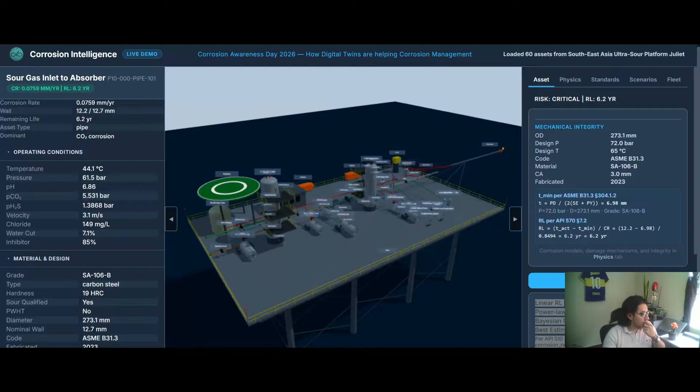So let me start. This is pretty much to share what we develop on Infinity, about the problem that we actually saw here. Imagine that you have this situation. This is an offshore platform that actually has a pipe carrying a hot acidic fluid full of dissolved gases. Over months, over years, the inside of that pipe is slowly being eaten away by the chemical reaction that we all are familiar with in these kind of platforms.

So the wall of that pipe actually becomes thinner and thinner and thinner, and at some point any of the pipes, any of the assets that we're seeing here, are going to fail. A leak, a rupture, or anything related to an unplanned shutdown that might cost millions of dollars and potentially puts a lot of people at risk. So this is mainly, in big words, the issue that we assess pretty much every day to avoid this risk, to have the best shape situation in the plant, and to confirm that the things we are doing are going properly.

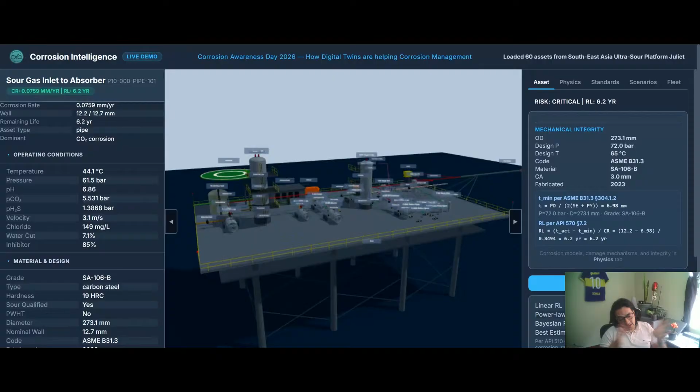So this is a 3D simulation again from a platform located in Southeast Asia, an offshore platform. We name it Juliet, it's not the actual name of the platform. So synthetic data on there. Thank you to our client for allowing us to use the data to train our models without violating any of the agreements that we have right now.

So we can navigate into the platform, we can move around, we can see the condition, we can see the pillars, we can see how many assets we have, we can go close here, and we can bring the information. So on this left part, we have the static data, the design, the operating data that is supposed to have everything: temperature, pressure, pH, CO2.

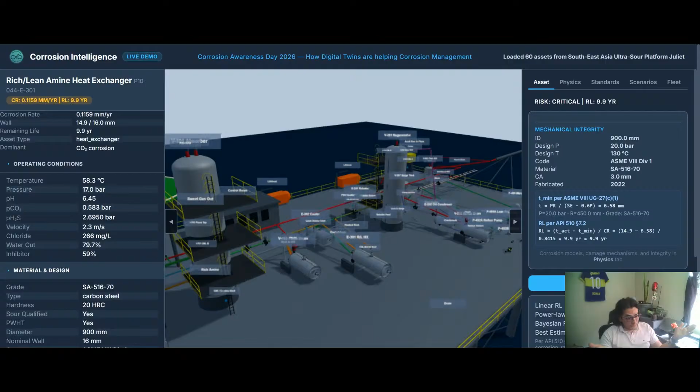This is taken from real time data, the values for pressure and temperature from the sensors. Also the chlorides, what is the design material, the grade, the type, the hardness, if it's post-weld heat treated or not, the diameter, the nominal, that is important, and also the code that information was taken from.

So I'm gonna bring the codes into a following part, but right now we have that any vessel that we select, any pipe that we select, it has the code related that we take the information. If it's vessel, if it's pipe, we can see the information here, and ASME B31.3 related to that pipe. So we built 4 corrosion engines.

So you're wondering what are those 4 corrosion engines here. We take 4 published corrosion equations, each handling a different type of chemical attack. Think of them as 4 specialists on a medical team. Each one is an expert in a different disease, and the system calls the right specialist based on what the patient needs.

None of us is a super expert in every field here. So we have reliability that is expert on that field, corrosion, material, design, rotative professional. Everyone is different, we have different skills, but together as a team, we build the best approach possible, bringing the appropriate specialist to the need that we have.

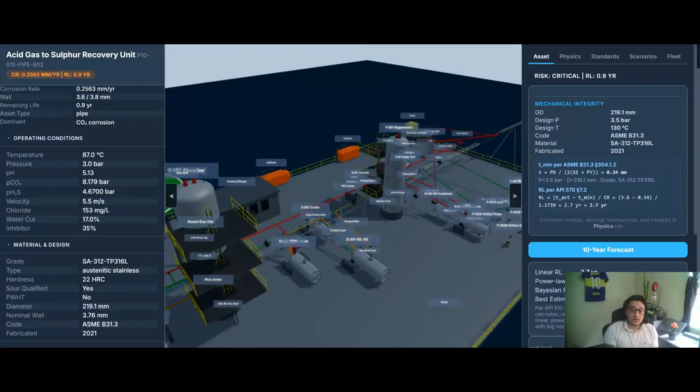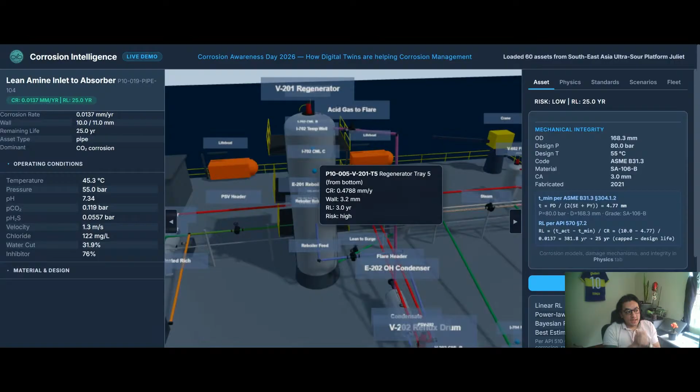So let me share here. Again, we're gonna now jump into the right part. I'm gonna just go around and show you a little bit closer. We have some of the tanks here. This amine inlet absorber, this is a pipe. We can click on whatever asset we want to check, and the information changes based on that related asset.

So five windows here. Asset, that's pretty much mechanical integrity. What are the equations we use for TMIN, for RL? That all is based on standards from API, from ASME. We use apps as well as a reference, and everything is calculated that way. So we have that mechanical integrity here.

We have the risk that we are supposed to have, and we can have a forecast. This forecast shows how the life of the equipment is gonna be. We have a threshold of 25 years at max. So if we click on the forecast, we know now in a graphical way that this equipment is not going to fail within those 10 years. It's going down for sure, but it's not failing. So that's the first window that we have here.

Let's jump into the fun part. So physics. We have again the models, the engines that we take from the equations. We also have the standards that we follow every day for each of the assessments, and we bring that into one calculated part, what the equations resolve. That's the physics-informed machine learning model, what the model learns from the data and applies the physics that we input into the model, and the relations between them.

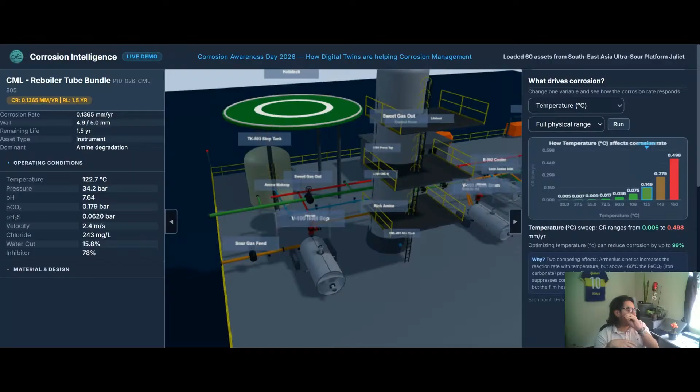So this is a pretty interesting part for including the best assets, the ones where we have 90-95% similar calculation, and also the ones that don't have the best compelling information. All the tools that we included here show you that these mechanical features are only in a linear way, and we cannot include the electrochemical situations that we might have inside. So let's jump into these three scenarios that we have here.

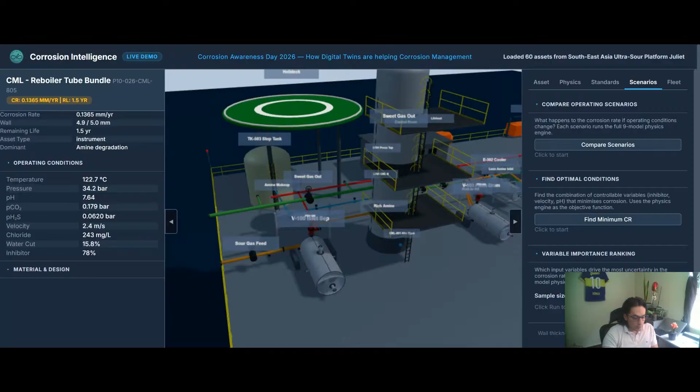I'm gonna make a pause just to confirm if the screen is still sharing well, sound is coming through well, or any weird thing happening, just to confirm. Let me see the chat. We're gonna solve those questions at the end of the session, so just as a confirmation. Let me. Okay, okay. Thank you so much for confirming.

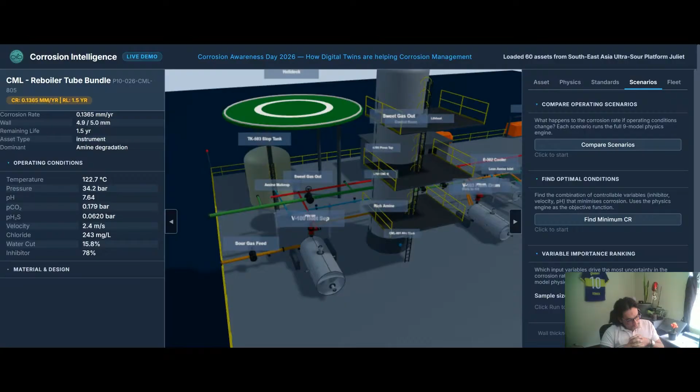So okay, let's jump into these scenarios. This is also a different feature that we include in this model, because here we can compare operating scenarios. So what happens to the corrosion rate if the operating conditions change? This happens all the time. So let me compare the scenarios here. Again, we saw on the previous sweep what the changes are. We have here inhibitor, pH, high velocity, or high temperature.

So what happens if we have high corrosion inhibitor? For sure the corrosion rate is gonna go down, but the question always is by how much, by what percentage, how effective is our inhibitor, is it effective or not. So we compare against the baseline corrosion rate, and we can see here if we increase the inhibitor, we have the pH that is stable, and low pH for upset conditions can increase the corrosion rate.

But the worst scenario on this asset we selected will be high velocity, a 213% increase in the corrosion rate. So it's also a pretty cool feature that we can calculate how the asset is gonna behave under different conditions. Let's jump into the following one.

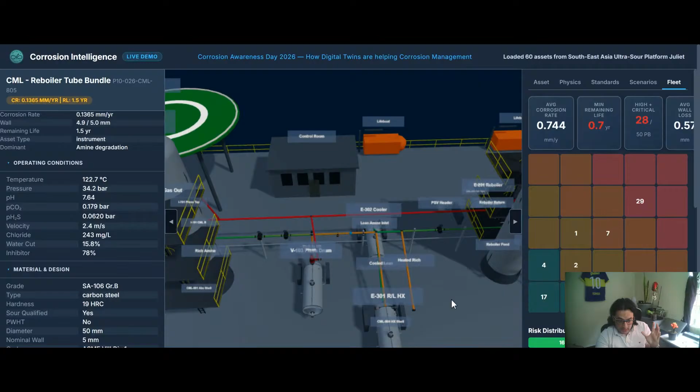However, it is connected on the client's end to the real-time operating, the APM connection that they have, the asset performance management, APM, and also the real-time asset data that they have in the database. So anytime that, for example, they replace this valve, this pipe, we will have that uploaded into the model instead of just going in, downloading the data, changing the information, uploading into the model, rerunning the model, retraining the model. So it will upload that information in an easier way to interact between the client database information and what the model is actually showing you guys.

So that's pretty much it here. I'm gonna just give you a quick round. This is in a development phase. The 3D models are for sure not super accurate like 3D laser analysis, no. But we have the most important part, that is see what the facility is doing, how the facility is doing, what is the risk of the facility right now, what is the driving corrosion rate per asset, how we can inspect it.

So we have at least five, six, or seven systems, including Excel, including PI, including APM, including ECMS or whatever asset management software you guys use, into just one view that can check the information, not jumping into different models or different software that we have. Not six or seven opening software between that.